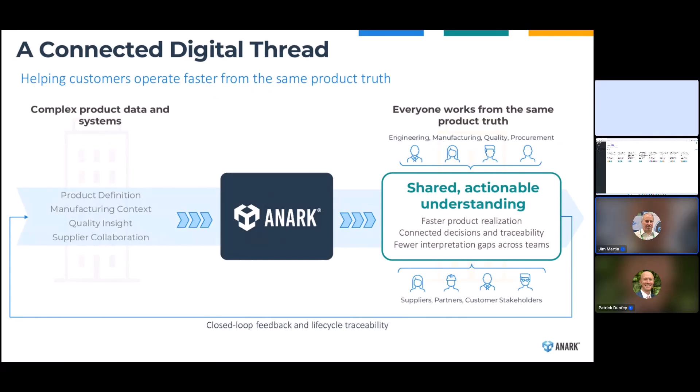One of the use cases we'll talk about later today is a tolerance change that needs to be made. All the information that PLM systems have needs to get out to people who need to operate off of that same type of information, but in a way that's a lot more easy to get to and understand. For 20 years, we've been doing this with 3D PDF documents or technical data packages. For the last 10 years, we've had web-based or HTML solutions to allow everybody to operate from that same type of truth. Again, we are not an authoritative system.

The authoritative systems are the PLM, the ERPs. What we're trying to do is make all of that information more consumable and actionable for the different use cases you see on the right there in the green box, which we're going to start to work through today. With the 10 years of HTML and web-based experience we have, we're going to show you some of the use cases we've built with the more recent additions and enhancements to the Anark Library platform. That involves content: how do we publish content in a way that's easier, faster, and takes advantage of AI where it makes sense to generate the type of content needed for somebody to consume.

The new concepts over the last couple months that we've talked about are spaces. Spaces take content and put it into a collaborative experience that's entirely web-based, allowing for markup, resolution, sorting of information, and archival and dispositioning back into your authoritative systems. It's all under one browser window, one environment, so that everybody who needs to come together and talk can have a uniform environment where they're communicating and collaborating on problems. One of the things we've been showing people is self-contained HTML and the connected documents we'll talk about - how are we doing this?

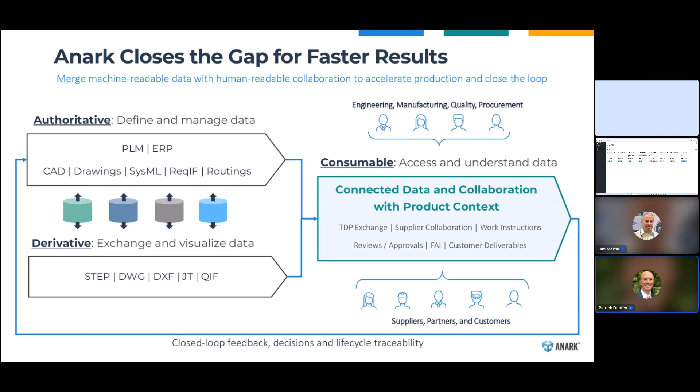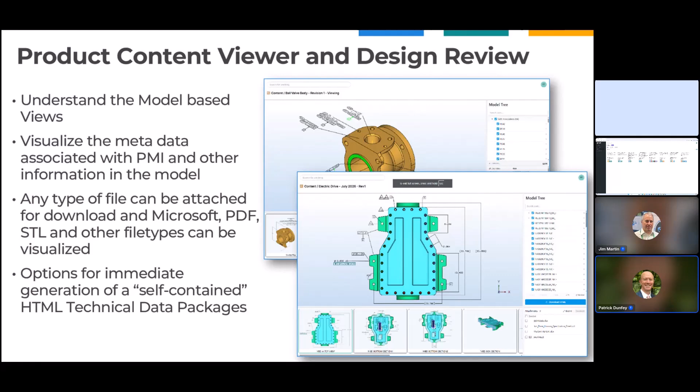And I think, if I remember correctly, you have the first example. So the first example that we were going to go through is the product content viewer and design review examples, one of several use case demonstrations that we have today. All right, take it away, Jim.

All right, what you're looking at here first is content, technical content. It could be documents, it could be 3D MBD—it comes from all the different MBD CAD systems, could be automated out of PLM, which we'll talk about in a second. And that content can be used within collaborative spaces. So we're going to dive into these a little bit more.

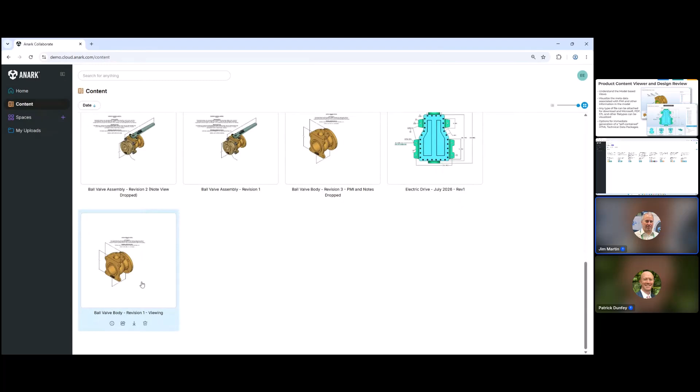So the first thing I wanted to show you was a couple of examples of some very simple viewing content. We're going to use the ball valve a lot and some of the legacy NIST models that everybody's seen over time. So when I double click on that content item, what you're seeing here is something that you've seen from Anark for a while. We've had variations of web-based content for 10 years. The way we built this is through the system that I just described.

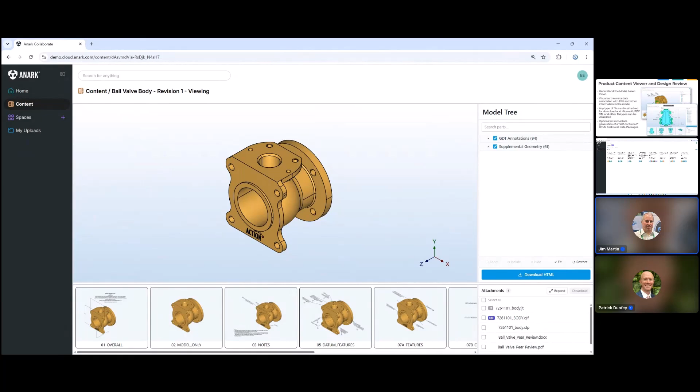So we have a panel for the viewer, we have a panel that is the model views, we have a panel for the tree, we have a panel for the attachments—and I'll show you some of these examples. And we have a panel to download this HTML from a hosted version to a self-contained version, because that's the direction that we're going with all this. It is another option that people have for technical data distribution outside of 3D PDF, as a self-contained technical data package.

So let's go through this. Think about behavior, user behavior, and the content that needs to be displayed.

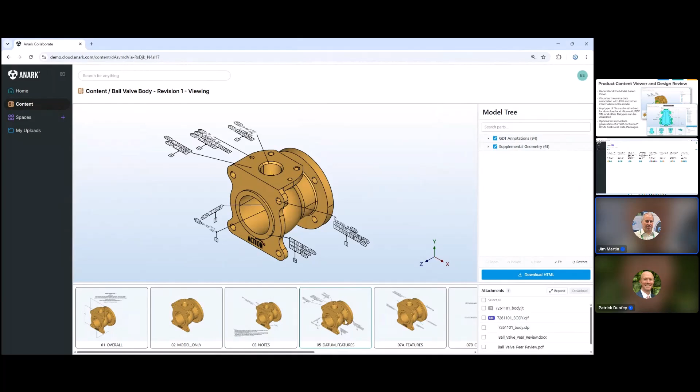So this user behavior, this panel drives this viewer. One of the biggest differences I need to explain to people is that those used to 3D PDF know 3D PDFs can only have one viewing window. HTML has no such limitations whatsoever, so we can do all kinds of interesting things.

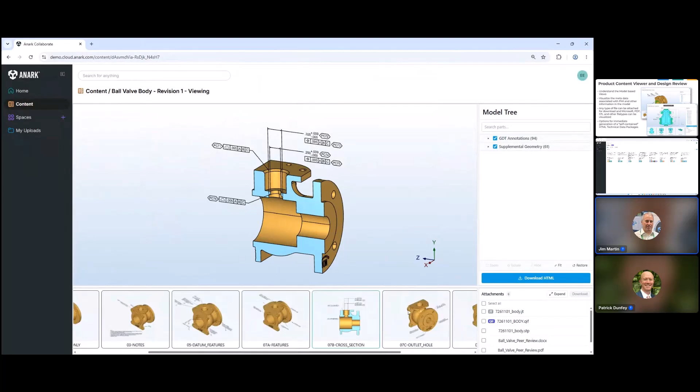These are similar things you've seen over the years. I'll apologize if the graphics are a little muddy, I need to investigate that after the webinar. But you can see these different views. This comes from Action Engineering's Valve. I can expand the model tree and look at different things, pick this, isolate that, or zoom in on it.

So that's the behavior we can build into the viewing approach. The other thing we can do is attach information. Tell me what you think a technical data package is and what needs to be attached to it, and we can help you get there. So in this case, we attach the JT file, we attach the QIF file.

In the case of a document, this is a Word document. So Word documents, Excel documents, PDFs, we can now attach those and visualize them as part of this new templating approach. If you wanted to attach an STL or another visualization format, currently we do attach a step file, but we're not visualizing it. QIF, we're not visualizing it either. This doesn't mean we couldn't do this in the future, it's just a matter of deciding what the important templates are and what's important to visualize.

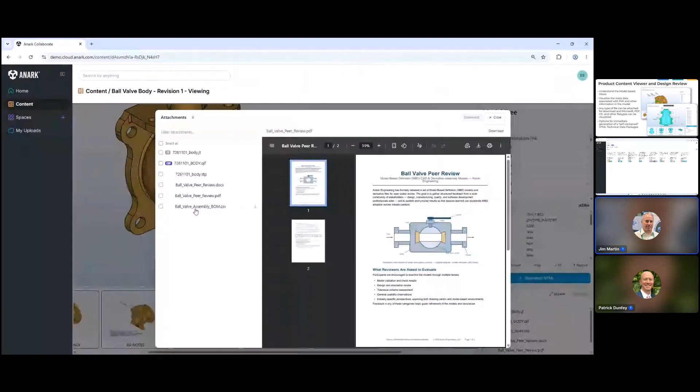And of course there's a business decision, right? There are libraries out there that allow you to affordably visualize certain standardized document types. In other cases, for the JT, the QIF, and the step, you can just go ahead and download it. I'm not going to do that here.

So I'll pause there. Now I'm going to go through and say, look, I really do need a self-contained version of this HTML. This is yet another capability built into this template, and all it's doing is generating the same type of information used to generate this hosted one. You can see here it went into my download folder. I can pop open a new tab.

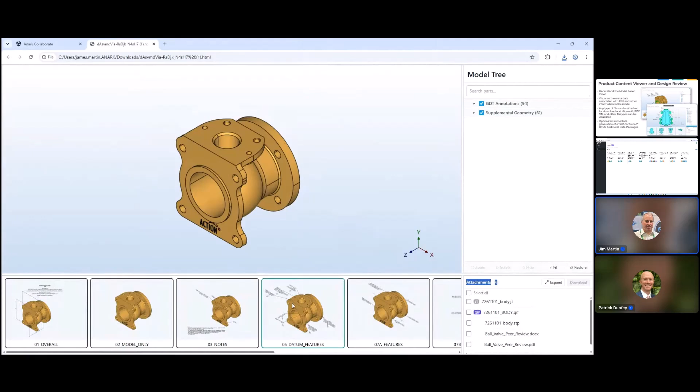You'll notice in this case, just to be very clear, this is not hosted, this is a standalone file sitting in my downloads. You can see the behavior is exactly the same. You'll notice here, though, we removed the button that generates a self-contained HTML. The behavior is very similar. I can expand out, I can look at the peer review.

So now we tell people, what do you want to have in this environment? What do you want to see? And do you need to have it hosted? Would you like options to have a self-contained version, or some combination of both that might be interesting to you? So I'll pause there because we have a lot of use cases we want to get to.

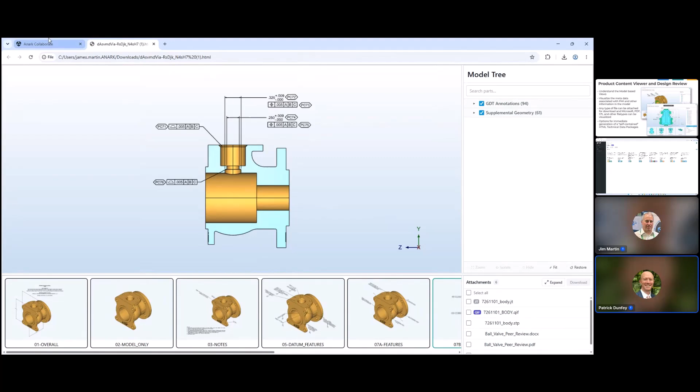The thing I wanted to say here is this is essentially the next generation of technical data packages, right? This is where it's headed. You started, if you click on that tab on the left. We're just getting started with the demos today. This is really traditional, if you think about it, in terms of what's possible - a bunch of content brought together into a single data package where you can view it, interrogate it, understand it.

Our level of being able to publish high fidelity PMI into the models and visuals we're seeing here is second to none. But other than that, it's pretty standard fare for us. What is unique is this ability to download this offline-ready, self-contained HTML data package.

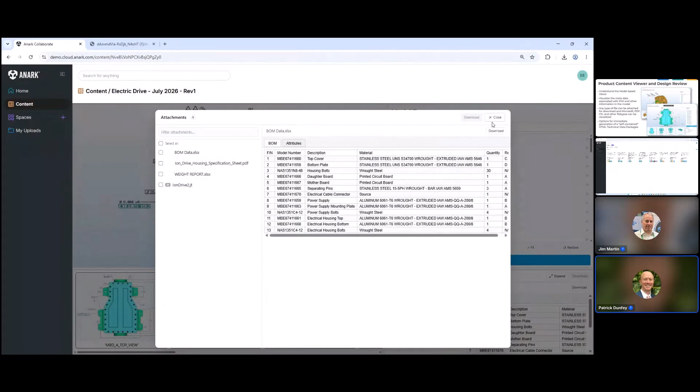So as we go through this, we wanted to get to a lot of other interesting use cases that go well beyond technical data packages. Think about this as the foundation for everything else we can show today, where we've automatically packaged up this content and made it accessible for a whole host of collaboration use cases.

People that want to start experimenting with standalone HTML versus maybe they've been using 3D PDF and want to explore this - it's fairly straightforward for us to allow them to test out the ability to create self-contained HTML technical data packages based on their existing work already done with Anark Workstation, Anark Publish, or other MBD adapters they already have in place.

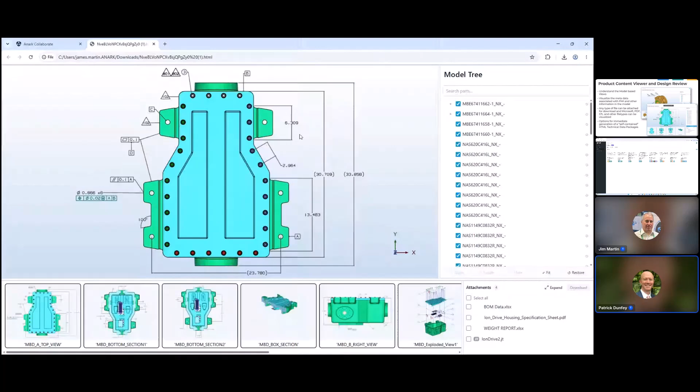Absolutely. And then you end up with an ultra portable package that also... these standalone HTMLs and web-hosted HTML packages, these are extremely powerful at handling large assemblies, right? So in terms of large assembly performance, it's night and day. Let's keep going with the topic.

So the question, it's like I planted the question. I promise I did not, but it's our next demonstration.

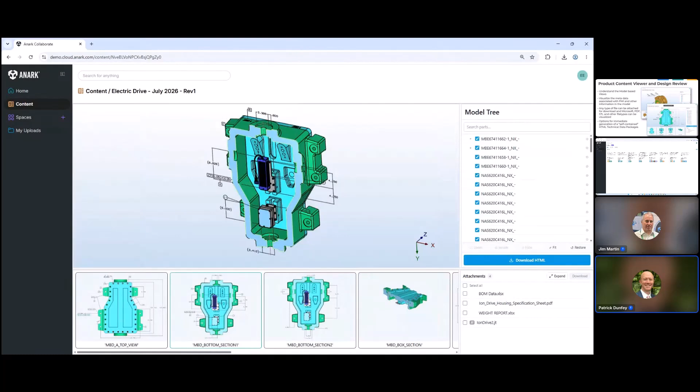So thank you, John, for asking the question, saying that they don't use formal TDPs, but all of their models, drawings, and other technical content, I could assume, is managed inside of a PLM system. Specifically for John here, we have the Windchill PLM system. And I'll just finish the question, which is, do your systems integrate with PLMs? So yes, indeed, very much so. That is our next example.

I promise I did not plant that question. That was just very well timed.

We have not only the ability to integrate with PLM systems, all the major PLM systems, and we can then extract and package up all of that data into that web-based format that Jim was just showing. And then you can also make that available as a downloadable, self-contained HTML package. But we can also round trip that information.

These are new enhancements that we've added to our reference integration that's been made possible by the architecture of the Anark Collaborate platform. And what I mean by that is anything you can do in the user interface of Anark Collaborate is accessible through an API layer that we have. And that API layer means if you wanted to create a space from a remote action in a different system, you can create a space.

If you want to add content that's published from a PLM system, you can do that and automatically add it to that space for collaboration. If you wanted to add users, do other things, anything you can do in the user interface in Anark Collaborate, you can do through an API call. So more on that in terms of the example, but what we'll show next is closed loop collaboration. So I will actually start in Windchill.

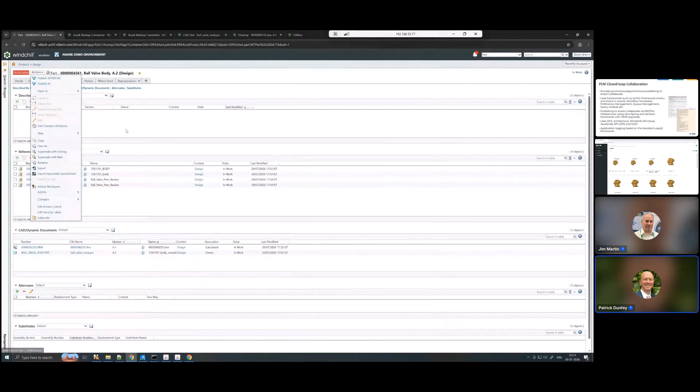Again, this is going to be a little bit cooking show because we have a lot of demonstrations to get to today. If you want to follow up and schedule a meeting with us, we can show all of this live. We can actually put other data into this Windchill system or a PLM system and show that live. But right now, I'll just show that we essentially get this link that's generated. This is the space link.

So again, that API call, when publishing content, we can package up the content, publish the content to Collaborate, create a space, add that content to the space, and do all of that automatically so that as a user, I've published this, but we just have to log in as Ed, our engineer, and voila, here we are in the system. So if I go back again, logged in as Ed, yep, this would be the link that brings me over to what I just saw, right?

So in this system, I have a number of different spaces, just like Jim was talking about before. And the one that we're talking about is the A.3 version of the ball valve body, right? And so A.3 is the version that we're looking at. And after we published this from Windchill to here, we then went and created a whole bunch of comments, right? So there's a comment from a supplier to Ed, and I'm the engineer here, Ed.

I would ask back in terms of the problem that they notified us about in terms of the 0.005 or 5 thousandths tolerance issue: what specific constraints do you expect? The supplier can get back to me and provide feedback and information on this. And then Sam, the supplier, comes back and says, okay, this is what I see. And really what it comes down to is cost and issues and all sorts of different things that can add cost, time, and problems to this.

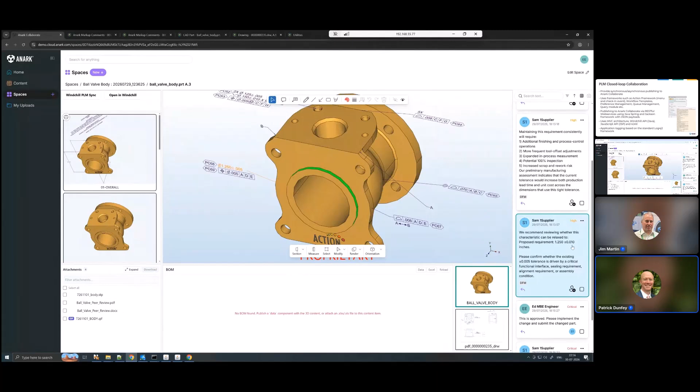So the supplier is actually asking for a tolerance relief, essentially. Can we loosen up the tolerance to 0.01 inches instead of 0.005? The engineer reviews it, says, okay, that's good. And the supplier goes off and does the work. Now, as the supplier goes off and does the work, they then need to share that information back so they could upload the updated part file to this space, right?

So we could, in essence, upload that part file to this space, which we see here. And then Ed could commit those changes to PLM. But really what it comes down to is however you want to do this, one of the most important things that we hear from our customers all the time is whatever happens in this space, all of this conversation, all the collaboration has to take place here, but we need to trace that back to the PLM system.

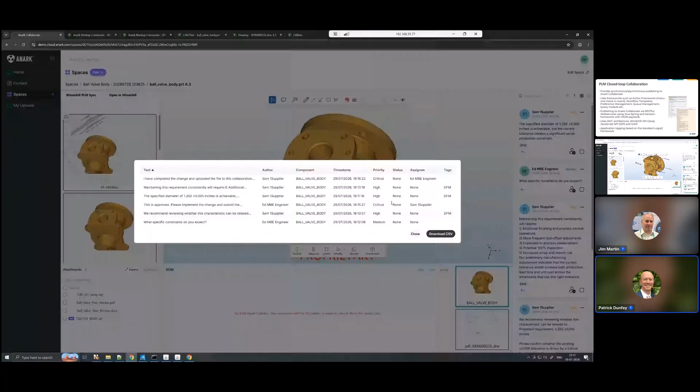So, like I said earlier, anything you can do in the user interface of the application, you can do with an API call. And so we've added that to our template where this table, this information of all the collaboration could be downloaded as a CSV, as you saw that button. But instead what we did was we created a sync with PLM button. This will now run the action of downloading the CSV, turning it into a more readable HTML format, and attaching it to the Windchill object in Windchill.

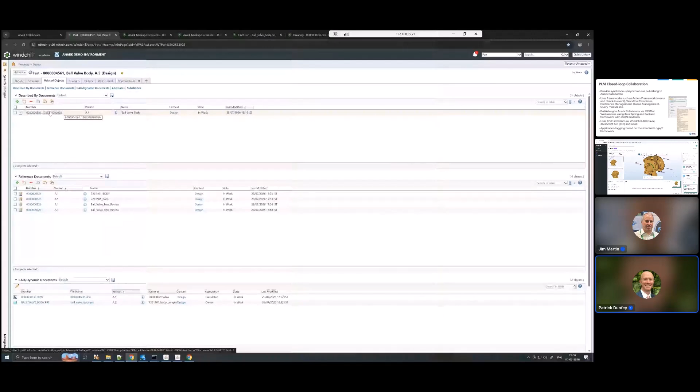And so when we click on the Open in Windchill button, we're then brought back to the latest version of this, which now has this new described by document. Again, we can show this all live, but to go through every step, we wouldn't have time for the other demonstrations today. So this is that HTML roll-up of all the related data. Automated, fully front to back, closed loop back to PLM, and cross-linked so that we can link out to the Collaborate space, and we can link back to the Windchill part object. And our reference integrations understand PLM part level objects, engineering, EPM, or CAD document objects, as well as document objects like Word and other related document objects.

All right, so as Jim says, I will pause there for a moment, but we have a couple questions that have come in. One is, beyond documents you include in the data package, does your API permit to share metadata? Yes, absolutely. So metadata in the PLM system, 100%. So as part of the publishing of the space, just one simple example, if I look at this, we're pulling some of the metadata from PLM, including the version number, the part number, and the other data at the space name level. We're also using the date and other stamps.

And any other metadata can be published in two ways. It could be published as part of the collaborative space, or it could be published as part of the data package as a specific set of table contents. So for example, not in this one, but if we had time for another demo, we could show the full indented BOM structure being published with all of the metadata and attributes associated to the EBOM or MBOM directly in one of these data packages. Okay, so that's the answer to Didier's question. Thanks, Didier, for the great question.

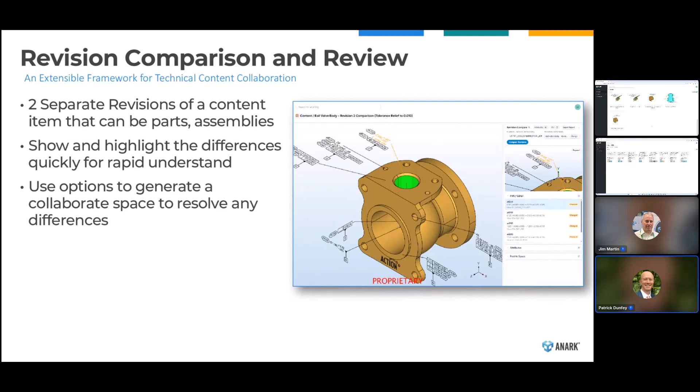Up next, I've just pulled it up on screen. You're going to take us through a revision comparison example. Yeah, let me go ahead and do that next. So what you're seeing now is, again, I'm looking at content. We'll constantly remind you of if you're looking at content that's been published a certain way versus spaces, which are collaborative environments that focus on the content. So what I'm going to look at here is the example that I published directly from my desktop of a different type of use case.

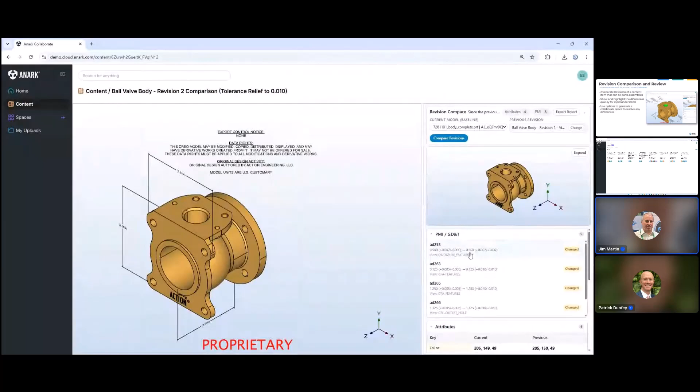And so in this case, we have revision 2 here that we've published. And I wanted to very quickly and simply look up an existing content item, the ball valve revision 1, and do a quick comparison. So I can go through and do a comparison here, and it generates the differences in the GD&T. As expected, this is revision 2 on the left, and we can start to put some titles and other kind of metadata into these views to make it a little more clear.

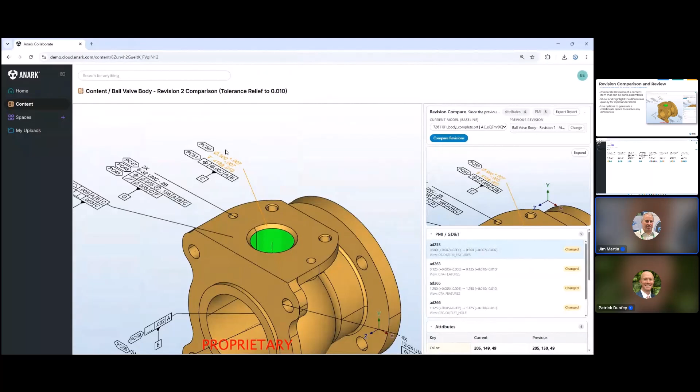That's not super complicated, but you can see here on the right, you have 0.005. On the left, you have 0.010. And you can see there were 5 different variations. And the other thing, we've kind of started to skip over the relationship between something that we're discovering as part of an investigation. In this case, we're comparing and generating the differences.

But notice how the content-centric collaboration that we've been talking about since the beginning of the year is all built into it. I don't think I've mentioned content-centric collaboration in a while because it's become second nature. It is built into all these different use cases that we have. So in this case, revision 1 to revision 2, and there's other things that we could be looking at where we can build these out.

There's visuals and then there's logic. The logic currently in this layout is developing a panel that shows you revision. It's showing a panel that shows you the attributes. It has a panel that our magician developers said, look, maybe we want to go over and just generate a space, include some other people, and try to resolve why there are differences. So I can say, create a space, and it generates a space very quickly. And then here's the new space that was generated.

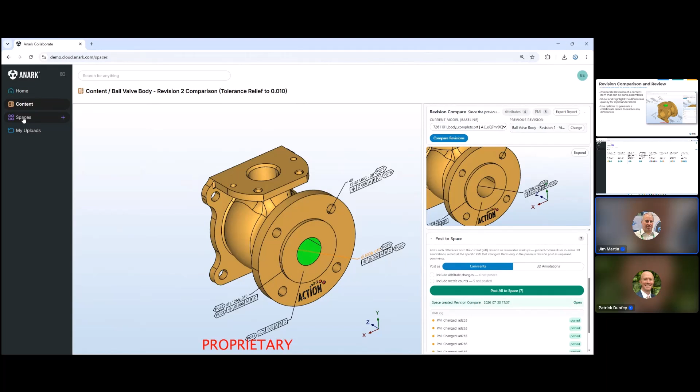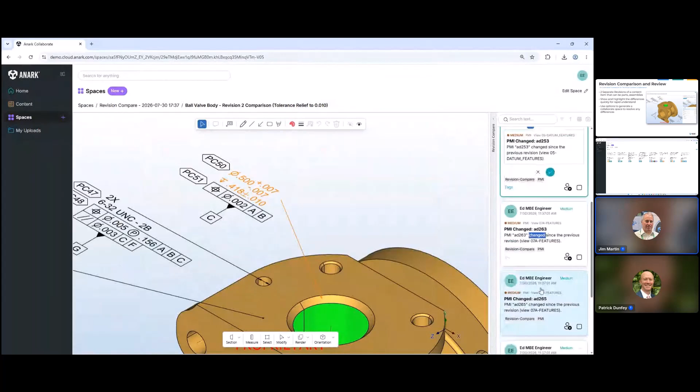We pre-built one of those that we can show you. When we jump into this space, you can see here that it assumed that it was Ed the engineer, and he was the person looking at the content and trying to figure out what's going on. And Ed the engineer now has multiple things that he's looking at. But you can see again, we're building content-centric collaboration into use cases and experiences that allow you to very quickly go through and do this.

And Ed may go ahead and tag Sam as our supplier and say, can you take a look at this? Why did this change? Just in case Ed forgot about the conversation. He can tag the supplier, and then we can add, in this case, a tag called revision compare and PMI. We could tag it for different suppliers. We could tag all the supplier one problems, supplier two problems. We can prioritize these, and we can start to sort these by priority, status, author.

We can have multiple components if you have a complex assembly, and the amount of tags that you are allowed to apply are pretty much unlimited. If you have certain tagging or metadata practices in your organization, you can inherit those and start to use them. Can you add Sam to that space?

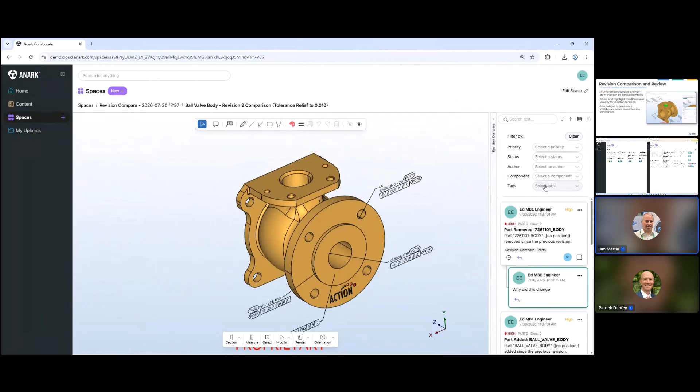I didn't, and I could. And at the space level here, I can modify it. And so right now, here's the name and description, the members. And Sam isn't in there yet. So now we add Sam as a member of the space, and here are the privileges, right? We're not going to get too deep into all this.

What do you want the person who's part of a collaborative space to be able to do? Currently view, comment. Maybe we want them to be able to upload some proof or documentation. Maybe they need to be able to download something that you attach to the space to work out the resolution of the issue. Generally, you're going to have somebody who's the owner who's probably not going to be the supplier. And we go ahead and save that. And now Sam is a part of that space. Open it up, and then Sam is in there.

And I think I know why Patrick had asked me to do that, because he was going to reply as a supplier, but he couldn't because he wasn't a member of the space yet. But now he's a member of the space. And there it is. Sam the supplier, because you told me to change it, Ed. So there we go.

But this is actually really interesting. We had conversations with small manufacturers who had email chains that were lost 10 years past on manufacturing decisions that were made that were never traced and understood as to why it would happen. And these are the type of resolutions that we can start to track and get back to people.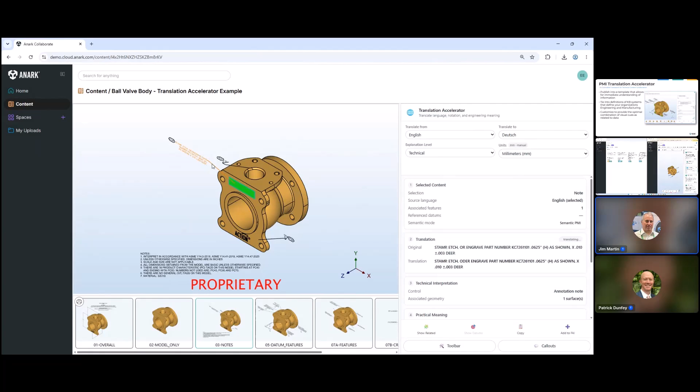And when I pick this PMI here, we can see the original information that was part of that. And then we can go through and translate it immediately. These are all just different panels that have been developed that can take information and use it appropriately for the person. The thing I like a lot about it is the practical meaning. In the case of a note, it's pretty obvious. But if I pick this one here, this is a roughness PMI.

It gives the practical meaning in English, and we haven't added the portion where we do the conversion of the English practical meaning to the German practical meaning, but that's pretty trivial to expand and add. And so that really gives people that are working across different organizations a nice environment to talk back and forth.

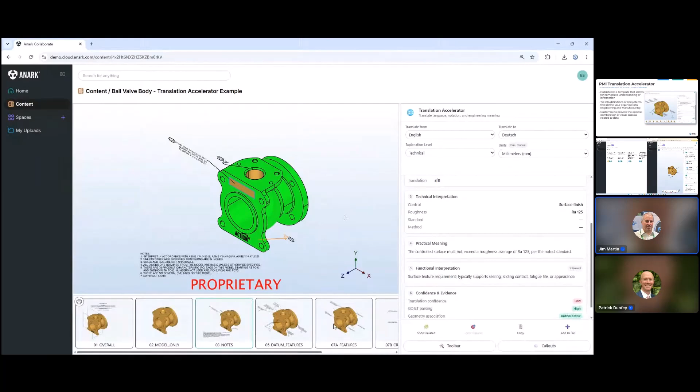And this was driven by a real world situation with the customer that we're talking to that has a multilingual type requirement, which is pretty standard these days. Everybody's global, everybody's international, a lot of different teams working in different countries all over the world that need to communicate and collaborate in one environment. A different template that reused existing panels but added on an additional panel that tied into the information.

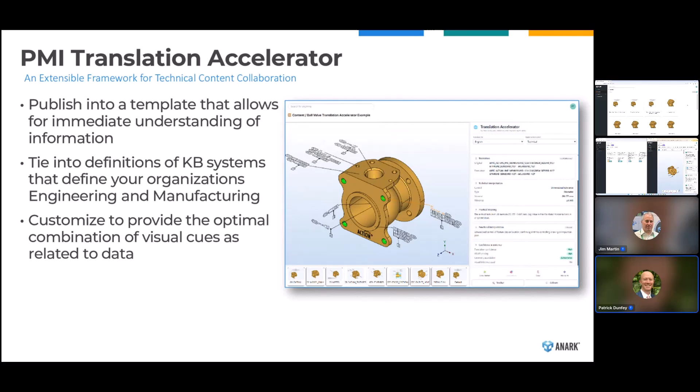No, that's fantastic. Just the one note on the PMI that you're translating there, that's nearly impossible. You can't just localize the UI of the software. You have to go into the CAD tool and translate the PMI, translate the notes. And so what we're doing here is, because of our deep understanding of the CAD geometry and PMI, we're able to access that information and translate it on the fly through this type of capability in these ultra flexible HTML templates.

One question came up as we were going along here before we get to the FAI example. So just giving you the heads up there, Jim, for that one next: what about 3DX, right? We mentioned Windchill, we mentioned Teamcenter. Yes, on 3DX, we actually have a customer case study on our website about integrating with 3DX.

And then there's a question about where is the data hosted by your portal? Basically getting into, is this on-prem, is it cloud, SaaS, etc. So by default, our software and our Collaborate, yes, it is a web-hosted application, but it is hosted in the hosting location of your choice.

In other words, you could host this on-prem the old-fashioned way. You could host this in AWS. You could host this in AWS GovCloud. You could host this in Azure. You could host this in any hosting system that you'd like. You would simply install the application in that hosted system and then open it up so that you can access it over the web and go through the usual security configuration there.

And as well, just while we're on the topic, tie it into your own IDP, Active Directory, LDAP, etc., so that you can control the access through your external access control logic and not have to manipulate all of the access control within the platform itself, right? So lots of deep integration. Most of our customers are significantly sized enterprise accounts that have lots of those types of requirements. So we're used to that.

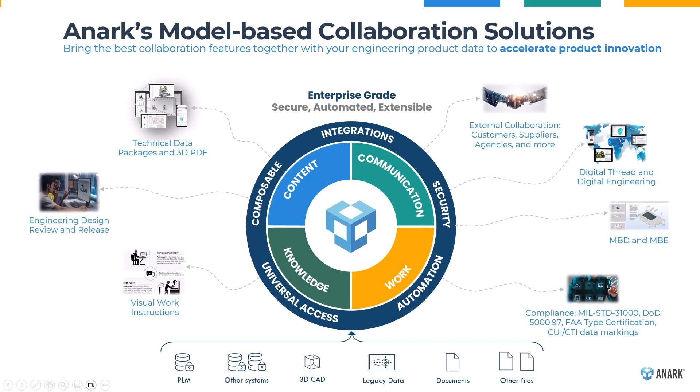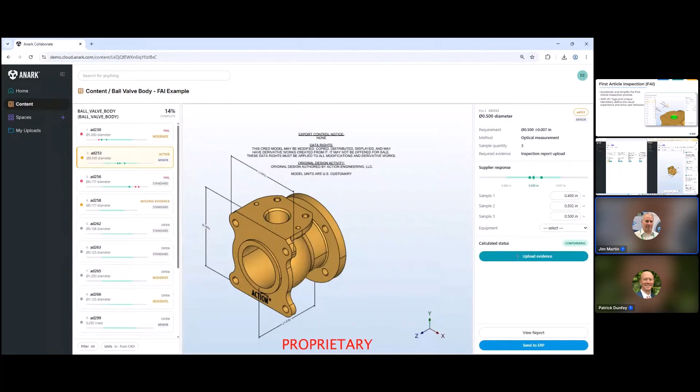All right, on to first article inspection. Jim? This is yet another example using the same model. So you're starting to see a pattern here. When we publish content, either automated or from the desktop, we're pointing to the template, and the template is providing the look and the behavior. So in this case, this is a first article inspection template that we're using. And so this is a content item that's really focused on accelerating the collaboration between people that are trying to resolve issues with inspection and manufacturing.

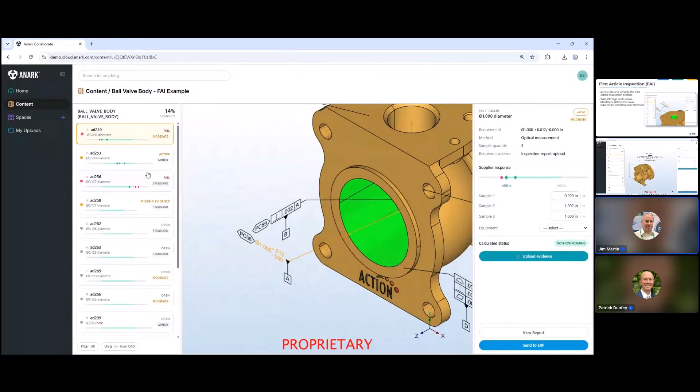And so a lot of this information, if you know the background of the Action Engineering valve that got made available publicly last year, it came out with Creo MBD models. Action Engineering has scripts that created the PC tags. The PC tags have the visual and the semantic information. So we're able to go through and just grab that information and start to build out some additional panels.

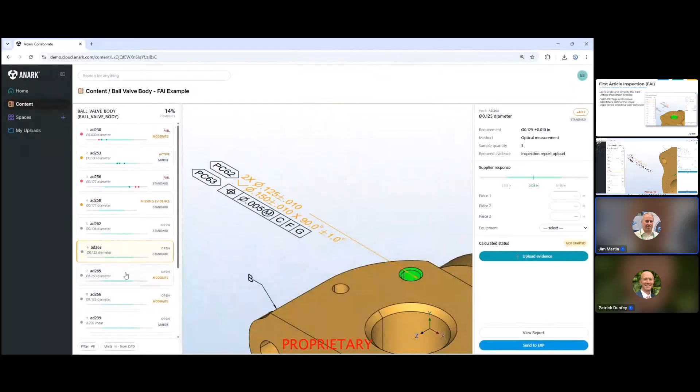The panels on the left, basically all I did last night was republish the same model using this template that said, oh yeah, I'm seeing PC tags. I'm going to grab the PC tags, whether it's one or 1,000, and generate the inspection list over here. You can see the information that's associated with each one of these, and on the right, you can see more details on that particular product characteristic. Then you can go through and you can toggle it. I can upload the information.

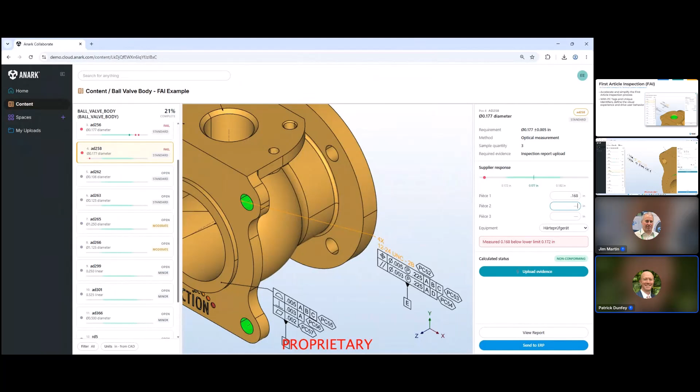So just behind the scenes, people probably saw my screen flashing down in the lower part. But if you go to number 7. Yeah. Got it. Yeah, and so you can see over here, we're tracking, right? 21 complete going through the operations. And again, these are mock-ups. We've literally been generating these very quickly as mock-ups and as examples of what people can do. So if your desired way of looking at inspection and how this should work is different, that's where we can have that conversation and start to get these panels and templates laid out the way you want.

But the way this one is working is it's showing you a fail, an active. If it's open, it hasn't been addressed yet. And then we can go through and mark these off one at a time. Yep. And then if you need to upload information related to that inspection, you can go ahead and do that and send reports out.

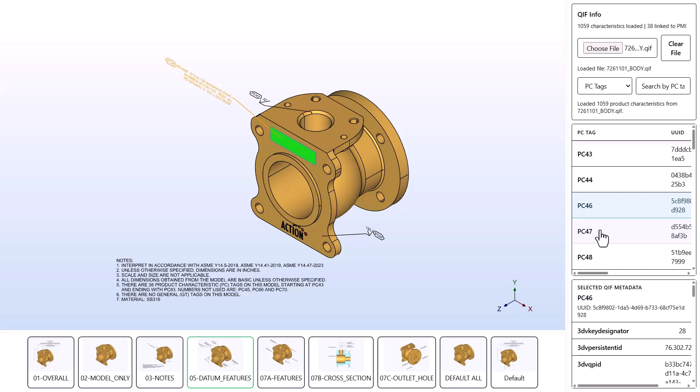And so a question just came in on this, and I can start the answer. You can also add in if you'd like. But Ryan just asked if we can read inspection results from QIF or other metrology report formats to populate this data. The short answer is absolutely. We actually have a standalone HTML data package example with QIF where the QIF file is read in and we're able to see the QIF data linked over. That's the QIF plan data, but we could do the same for the results. And so, yes, the short answer is yes, you could.

This was, let's call it, a vision of the future. We actually showed this to somebody recently, and they said, what if our suppliers aren't ready to use something like this? Can we do something that's a little more basic? And the answer is yes. And so that could be submitting the QIF. That could be visualizing the QIF against it. There's a lot of ways to do that. But we're able to just open and read in the QIF data and show it side by side with the CAD.

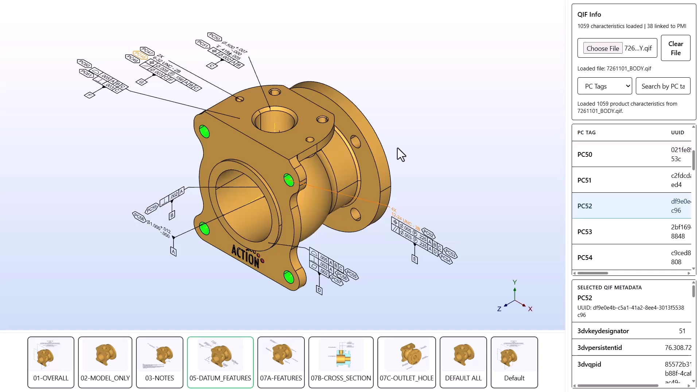Great question. Yeah, actually one of the things we just added to our website is some samples of self-contained HTML, and we can make that available to everybody because we've been showing that for about 4 months. Perfect, great, excellent, loving all the questions today.

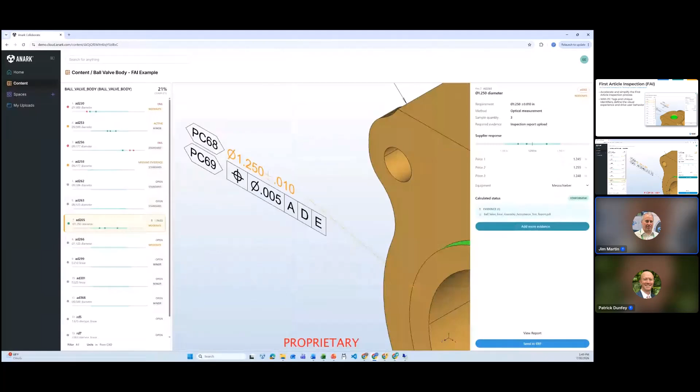Can you write QIF files and formats? No, we do not, but we have partners, and obviously there are solutions out there that can write the QIF data out, and once written, we can ingest that or upload it and have it be accessible and readable in a human format side by side with all of this other data.

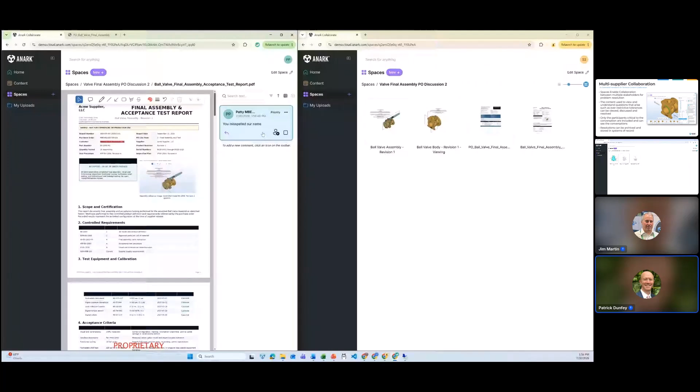Okay, so I could put that in here. And then again, because we're both side by side in the system, right, they could start to go back and forth - I will fix, right? Great. So we can do not just CAD markups, but full document markups against content that's in the system, and go back and forth, drive these types of discussions throughout.

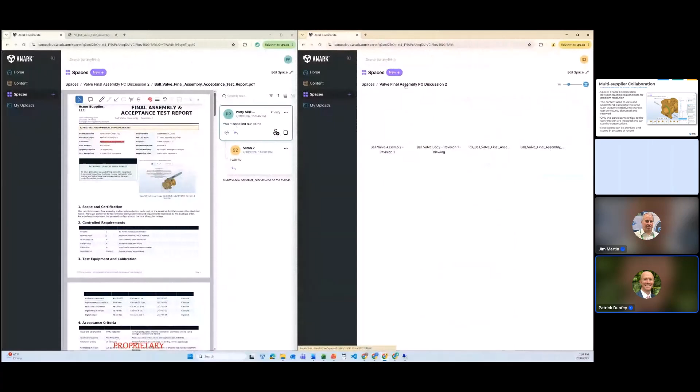What's important to note here is this CAD data, these data packages, this content that's in both of these spaces for both suppliers, is being reused from the source content that was published to the system. Because when a supplier logs in, they don't actually have access to any of the content. All they have access to is the space you've given them access to and the content that you've shared to that space.

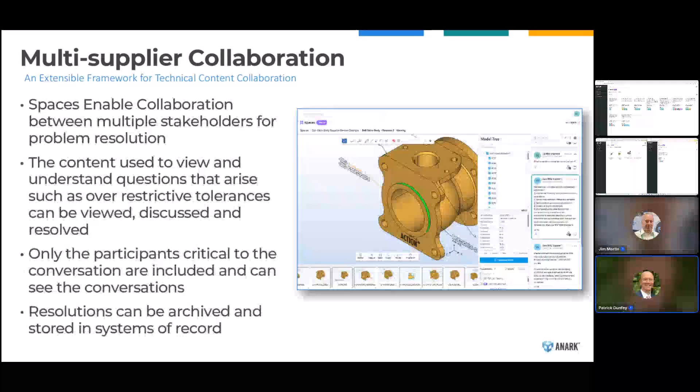All right, rapid fire, we only have 2 minutes left. So I'm going to skip over because we kind of did document review there, but we can do document review side by side with the CAD data. And so I'll just hand it back over to you at this point, Jim, to continue down the path and close us out for today.

What you're looking at here is just kind of an overview or review of everything that we've been talking about - the content and the rapid way that we're using modern technology to generate the user interface and the behavior that you're looking for, the ability to use that content in spaces. But the thing that we always come back to: if you can't get the MBD or the MBE information into the content in the neutral environment, whether it's 3D PDF, self-contained, or hosted HTML, then you're going to have problems.

And so there's a good blog that Jim Mary, who many of you know, who used to be with Adobe many, many years ago and has been with us forever, wrote to talk about this. And one of the key bullets that I'll point to, that very last one - without naming names or anything - there's a lot of 'oh yeah, we can do MBD' going on out there at Realize Live, at PTC User, at COE, all these events.

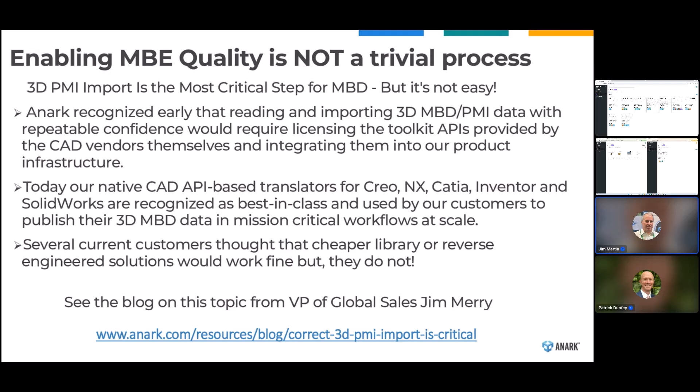And so some of our customers started to look at it and they realized that cheaper libraries - they thought they could buy something quick and easy and that would handle MBD, and it doesn't. And so they come back to us, we figure it out, and we solve the problems.

We're going to keep talking about all this. We're going to keep talking about our support of all these different MBD initiatives and the ability to use Anark Collaborate for a lot of what we're doing. And the biggest thing coming up in August is that Anark Collaborate 26 is what we're calling it. Next month, we're formally releasing it. We've been working on it continuously.

Yeah, the short version there on the overall launch of the product is we've been operating in a beta mode. So everything that we showed today is in the beta of our product. We have our beta in the hands of some select customers. In a few short weeks here, we will officially launch this product, and everything that we showed today will be commercially available off the shelf. So we're super excited to run this event and bring this product out to the world. It's going to be a good one.